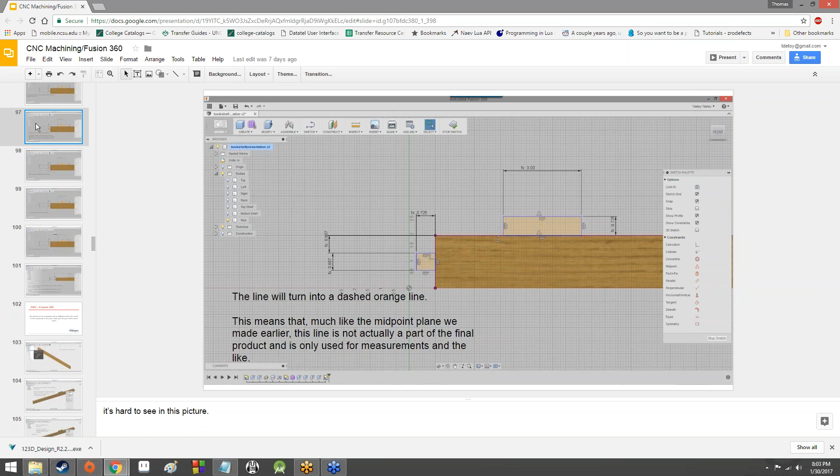All right, well, hopefully. Anyway, I hope you're ready to continue with Fusion 360 as well, because that's what we're going to be using today, to nobody's surprise. We've probably got about 2 or 3 more sessions left with Fusion 360. And then we will be moving on to perhaps VCarve. We shall see. So let's go ahead and get Fusion 360 open.

And that'll just take a minute. So we'll just hang out for a minute while it does its thing. Or two, minute or two. All right, off to a good start.

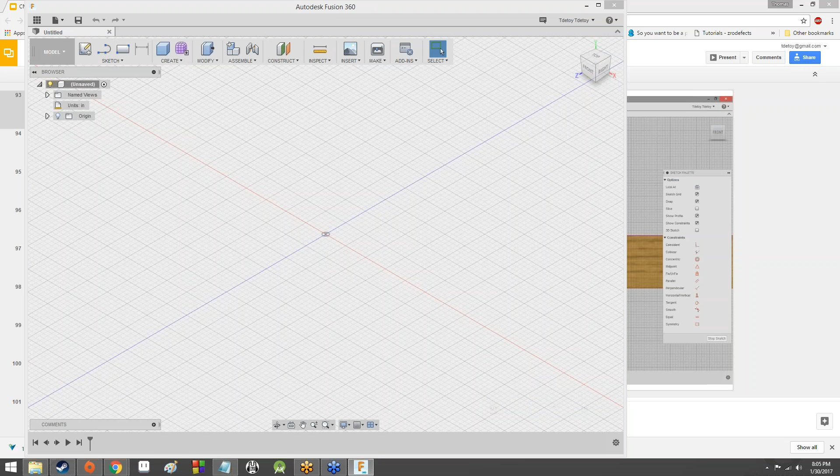This thing apparently has some pretty steep memory requirements, and a lot of stuff to pull from the hard drive. Okay. Oh, it looks like there's an update. Well, I'll see how far I can get before that update is applied and I have to restart. So I'll go ahead and open up the project we've been working on.

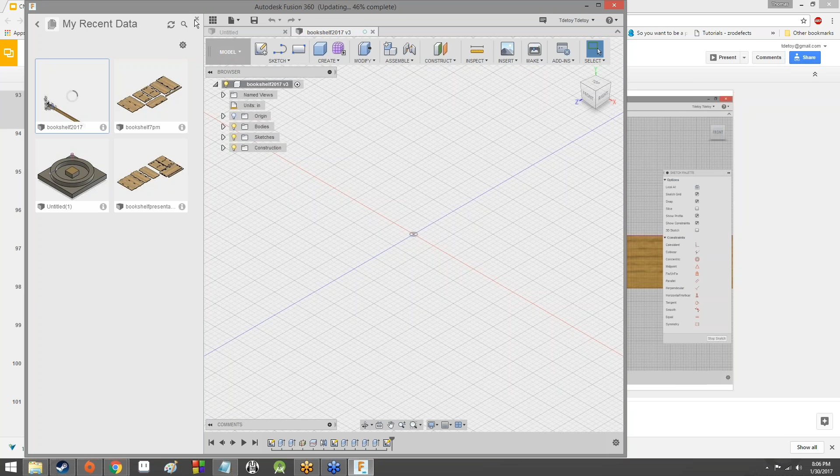It looks like it's updating. That's part of the reason why I've got just an absolutely abysmal frame rate. Let's see what happens once it reaches 100%.

I can't talk right now. Blep, blep, blep, blep, blep.

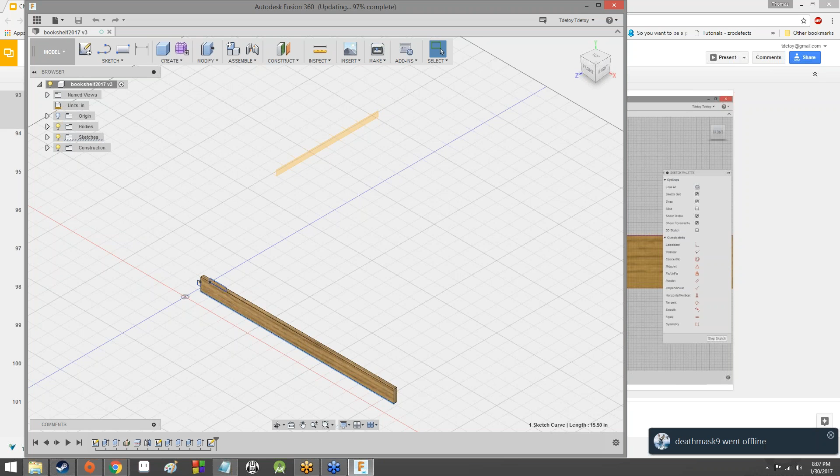Raise your hand if you're going through an update as well. Okay. One hand. All right, so you might run into the same thing as well.

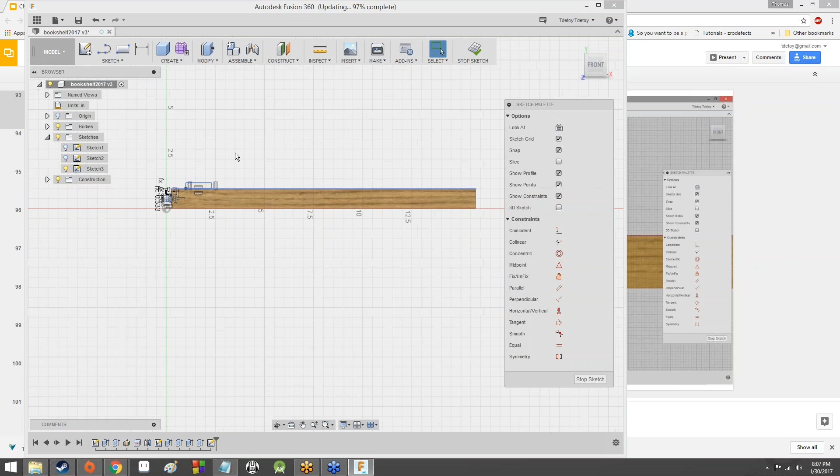Well, in the meantime, let's go ahead and continue with the sketch that we've got going on here. So last time we created a couple of tabs on the kick plate, right? So I went ahead and hid all of the bodies except for the kick plate, and then drew a couple of rectangles on it, one on the side and one on the top. The side rectangle we dimensioned out, the top rectangle we have not yet. However, that is the plan for both of them.

The side rectangle we dimensioned out so that it had a length of 1/4 inch, which was basically just the distance from the side of the kick plate to, it's just ply. It's actually ply. And can anyone sort of visualize why it might be ply? Take a guess as to why it might be ply.

Okay, well, the reason why it's ply is because it's going to be a tab that sticks into the side wall of the bookcase to help keep this kick plate anchored in place. That's the same deal with this tab on the top here. That's going to be anchored into the bottom shelf. So when all is said and done, this kick plate will be locked in place by these tabs. Now we've only got 2 tabs so far. We're actually going to eventually have 4, but we're going to spend some time getting these 2 tabs set up first, and then we'll worry about the other 2.

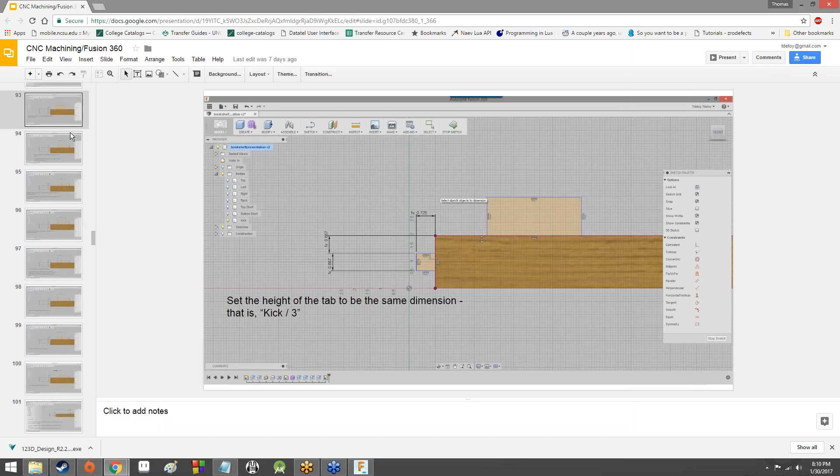So let's go ahead and sketch dimension. I'm going to go ahead and dimension out the height of the tab, and this is really running so much slower because it's trying to update at the same time. I'm going to set it to be ply. Hit enter twice, and make Fusion 360 go away. Okay, there we go. So now the height of this tab is ply. Then we're going to sketch the width, and the width is going to be tab.

So now it's 1/4 inch tall and 1.5 inches wide. And this is the size of most of the tabs that we're going to be working with in our bookcase design, at least for now. It's probably going to be modified a little bit in the future, but for now, that is the design we're going to be working with, the sizing and everything.

And then we're actually going to sketch a line on this tab right here, and there's a reason for doing that, which you'll see in a minute. So if I mouse over various spots on the line that defines this rectangle, sometimes symbols pop up. I know I'm on the line because I get a blue X on my cursor.

The top dimension, that's just tab. It's one of our user presets, which turns out to be, I believe, 1.5 inches. And then the height of it is ply. Okay. All right. Excellent.

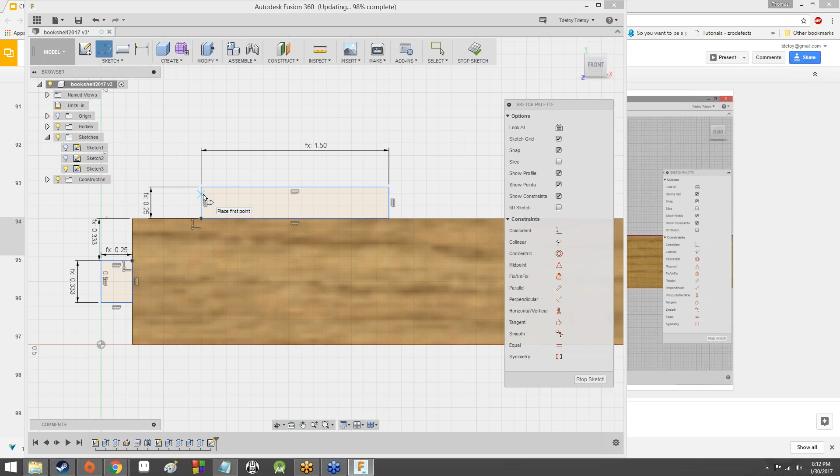So yeah, I know I'm on the actual line defining the rectangle if it turns into an X. I know I'm on a corner of that rectangle if it turns into a square. And then there's one where I get an X and a triangle. That lets me know that I'm at the midpoint on that line. So as you can see up here along the top, I've got my cursor there, I've got a blue X, and I've got a blue triangle just sort of hovering up and to the left of that blue X,

which is great. That means that I am at the midpoint of that top line, and that's exactly what I want. So I'm going to go ahead and click there, and I'm going to draw a line straight down. I'm going to confirm that it's straight down because I get the little 90-degree indicator above and to the right of my cursor.

And where my cursor is, again, I have a blue X and a blue triangle, and I have another little blue symbol. It's a little blue square on that line, which is just letting me know that it's a 90-degree angle. So I'm going to go ahead and click there, too. And I'm going to create this nice blue line.

What are you trying to dimension, Mateo? What are you trying to dimension that gives you that? Which part of it? Were you able to get one of the dimensions done, or has neither of them worked? Okay. Tab's supposed to be 1.5 inches. I may have accidentally put 3 when I was putting them down. Okay.

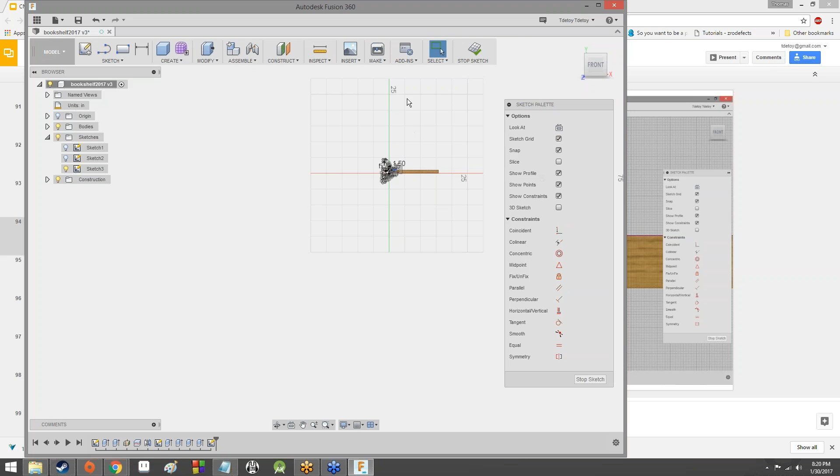So we've just turned that line into a construction line, just like that midpoint plane that we have somewhere up here. Or I guess somewhere up here. Whatever. Anyway, so if you click on the line, you'll get the sketch palette on the right-hand side, right?

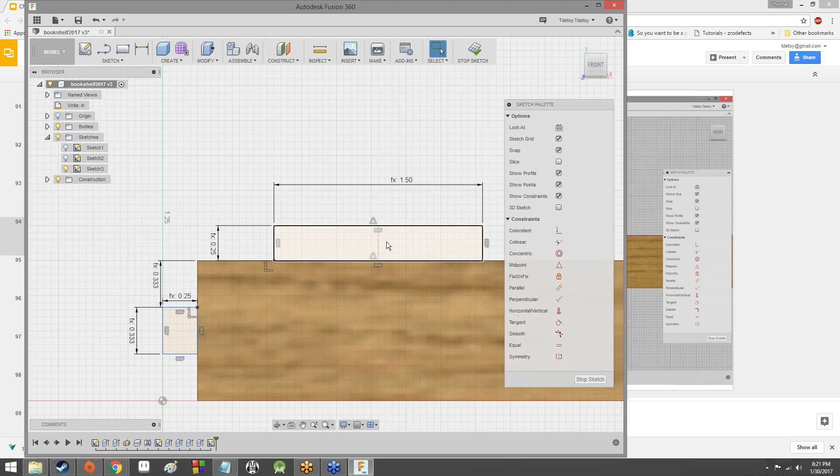Do you see the sketch palette? Okay, yeah. It's going to be normal/construction at the top there, and then that's going to turn it into an orange dotted line. For sure. So now we've got that. We're actually going to use this to determine the distance between the origin and the midpoint of this rectangle.

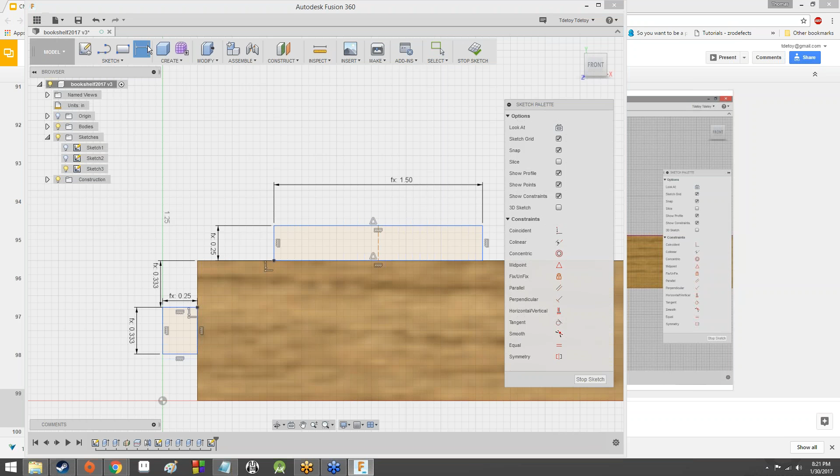So remember that a construction line isn't actually part of the final product, right? So I'm going to click here on the origin, I'm going to click here on this construction line, and I'm going to bring out a dimension here, and I'm going to make that width divided by 3.

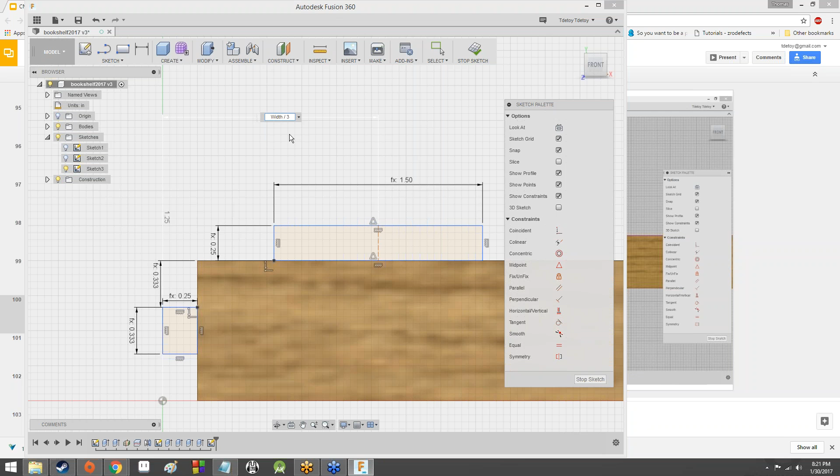Bam, and it's going to stick that tab way further in towards the center of the kick plate. So now we've got one on the side and we've got one in sort of the middle top. Now why do you think I used the origin? Any guesses?

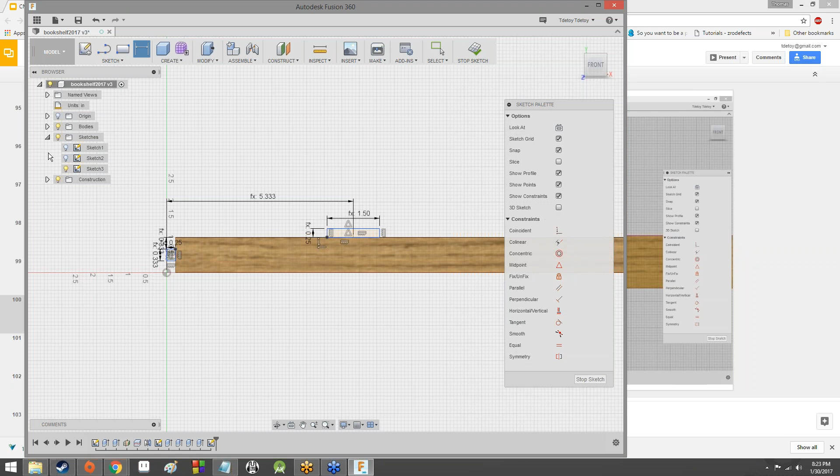How so? Which part is not working for you? Oh, you can't even draw the initial line before making it a construction line? Is that what you're asking? Because you say it won't let me draw the line. Are you saying that you can't draw this line that we drew right here?

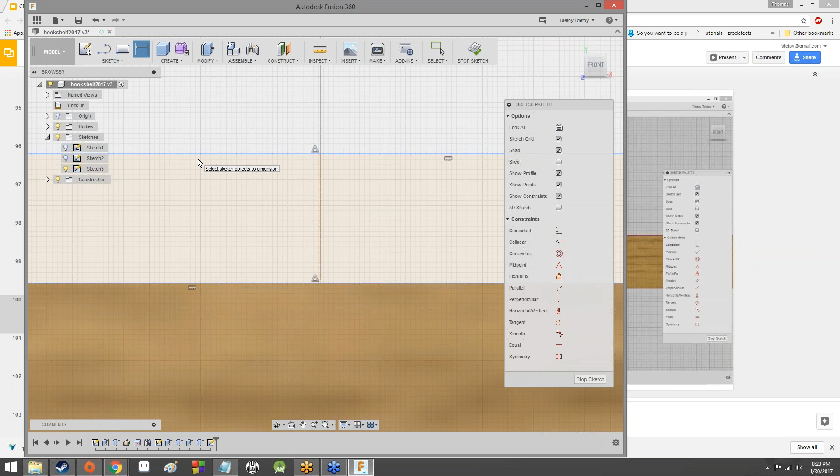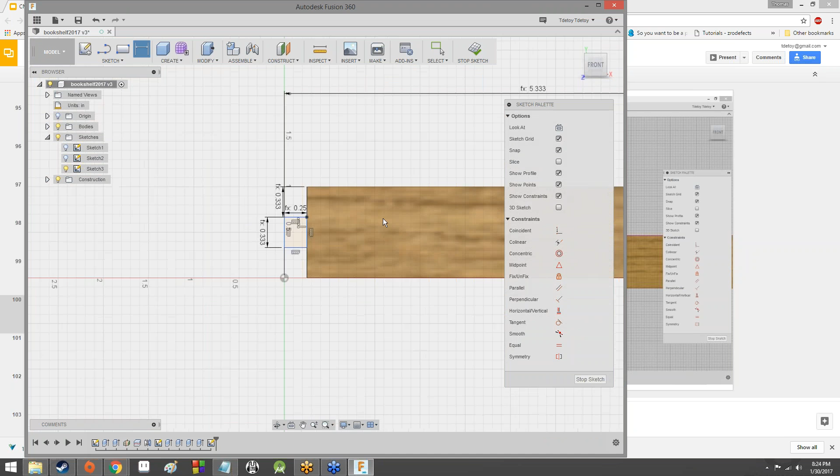Okay. So you can't sketch the dimension then? Okay. So you clicked on the origin, right? Like you got the little dot that pops up when you mouse over the origin and you clicked on that? All right. And then you clicked on the construction line over here, right? Like it highlighted and became like a little bit blue when you clicked on it?

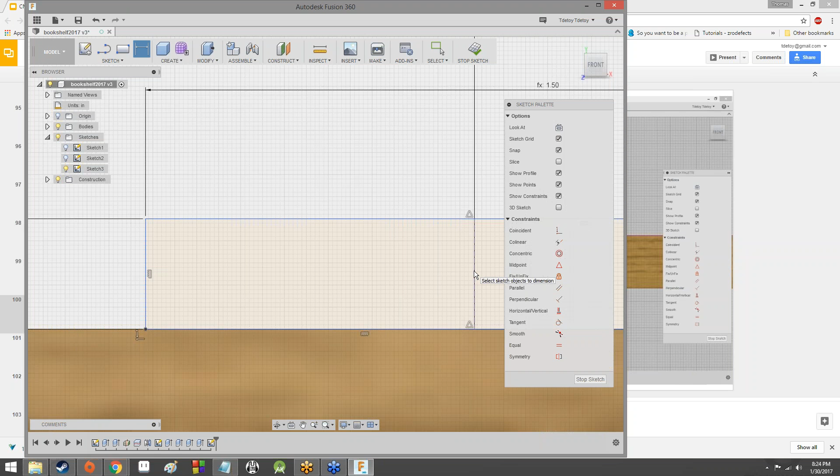That's odd. That shouldn't be the case because, hmm. So what? It's trying to dimension out from the origin when you're sketching dimension? Is anything happening when you move your cursor away from the origin? Like, are you getting any sort of measurement coming out of it or anything like that?

Okay. All right. Well, as long as it's working now. Oh, gotcha. Yeah, that happens. This is surprisingly resource intensive. Okay, so yeah, make it width divided by 3. And so does anybody have any guesses as to why we used the origin?

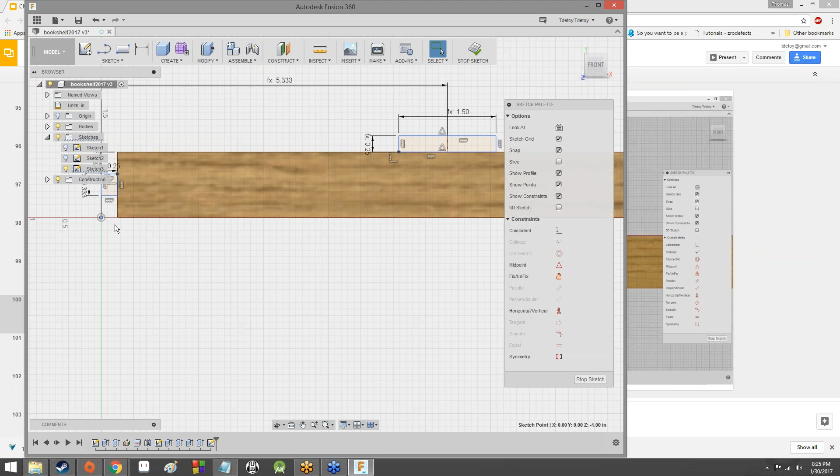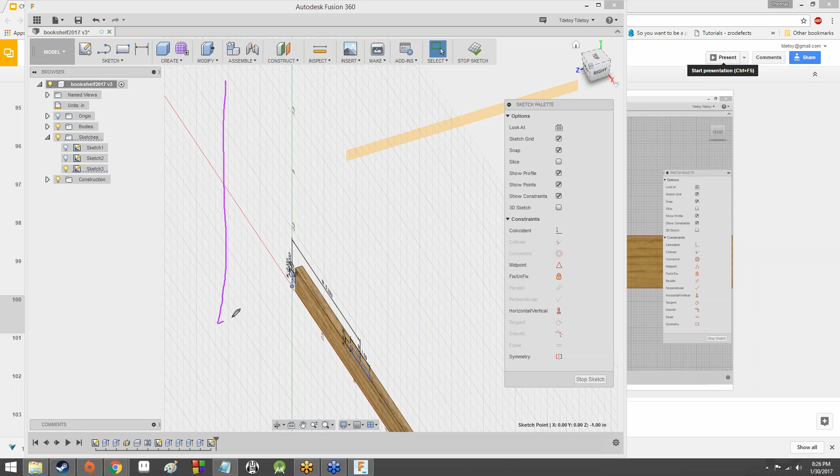Okay, so I'll tell you. Remember that initial sketch we drew that had all of the rectangles on it? We drew that on a plane that was perpendicular to this one. Essentially, if we were to look at our drawing like this, our initial rectangle drawing, let's not use gray. Let's use purple. Our initial rectangle drawing was oriented kind of like this, at a perpendicular orientation to our kick plate right now.

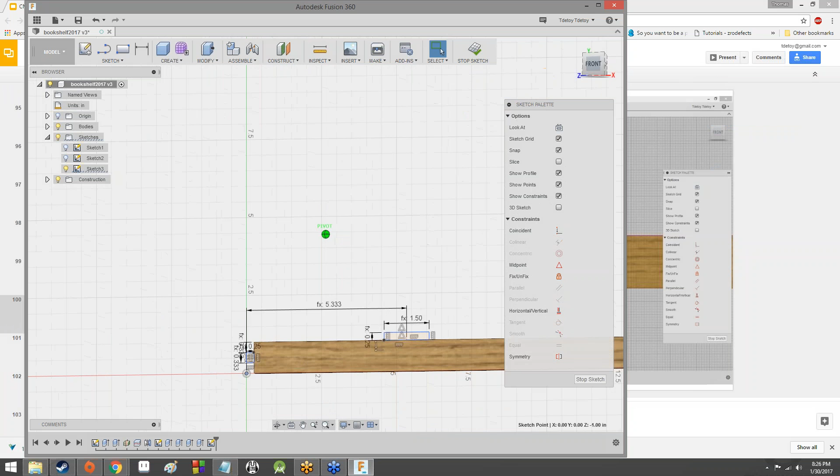We drew it on that plane and we started at the origin, the actual Fusion 360 origin, which means that if it's at the origin on a plane perpendicular to this one, looking at it from this angle, we're essentially looking at the drawing side on right there. And remember how we extruded the wall of the bookcase out from our drawing? So the wall of the bookcase is something like that, which means that our kick plate

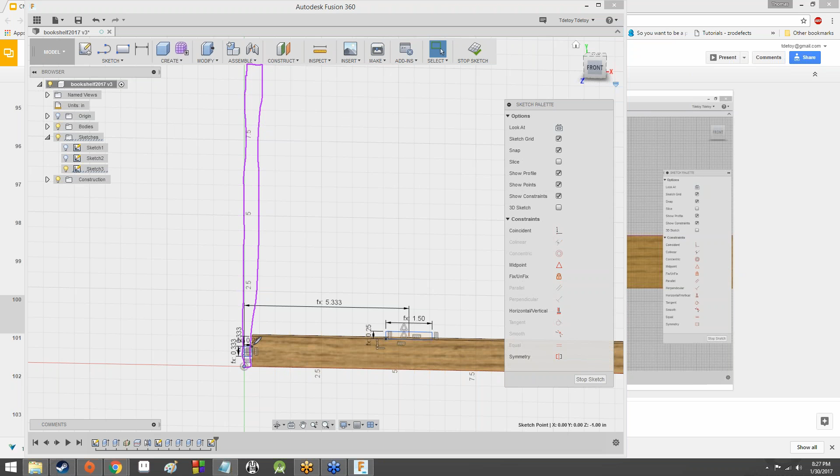this tab right here is basically flush with the outer surface of the side wall of the bookcase. So this origin right here represents the start of the outer surface of that side wall of the bookcase. So what we're doing is we're measuring a third of the entire width of the bookcase, from the outer surface on one wall. I'd like to do a smaller drawing here.

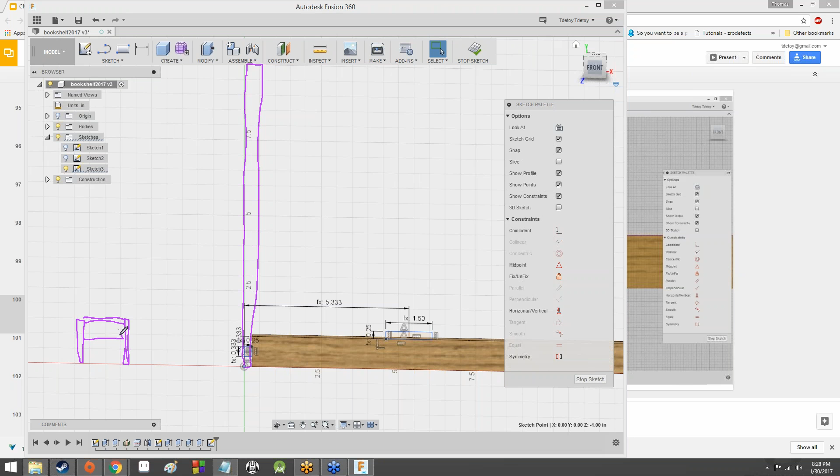What a charming little bookcase. Oops. So this is what we're looking at. We're actually measuring from here to here. That's the entire width of the bookcase. That's why we're using width divided by 3.

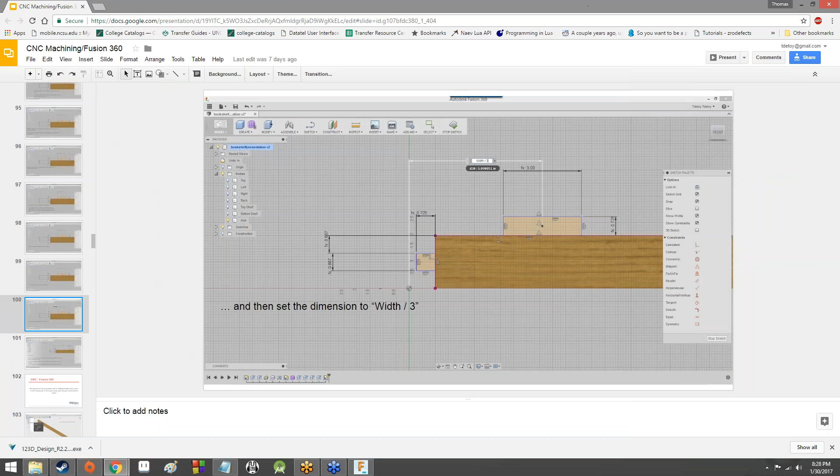So with that done, actually, why don't I just make this easier? Left wall. Boop. There it is. As you can see the origin right there. Bam. With that done, we've actually finished the sketch for that kick plate.

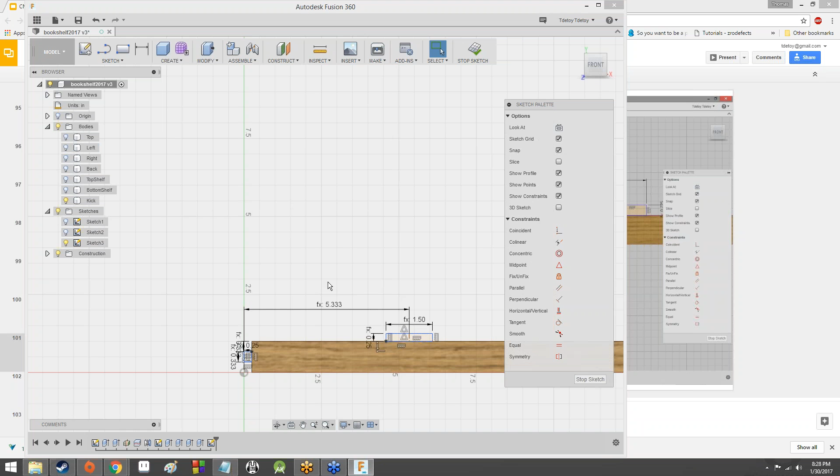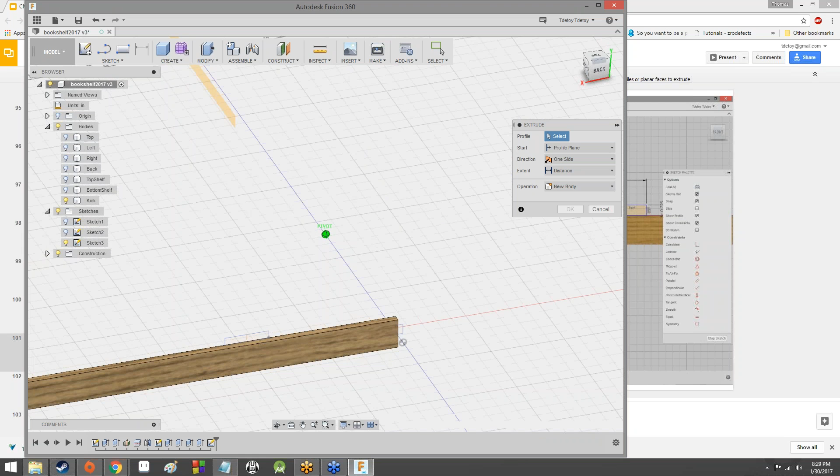Excellent. So now what we have to do is basically extrude those rectangles. So we're going to go to create and then extrude. And so now we've got our 2 rectangles sort of floating here in 3-dimensional space on the side of the kick plate. I'm going to click one, and I'm going to click the other one.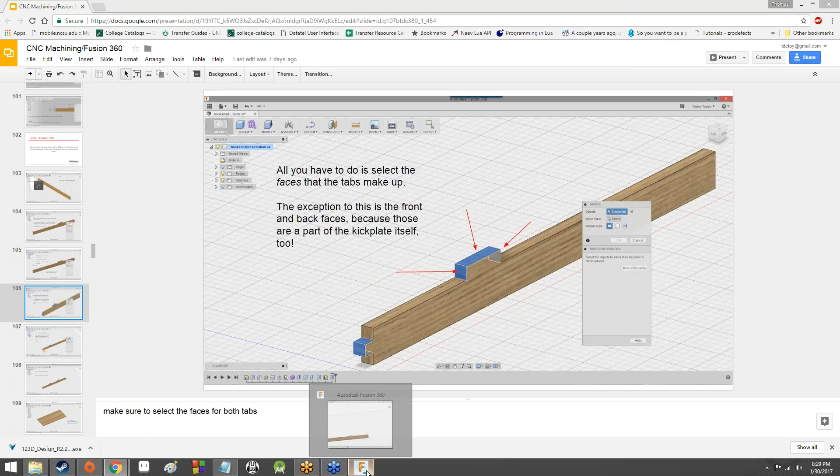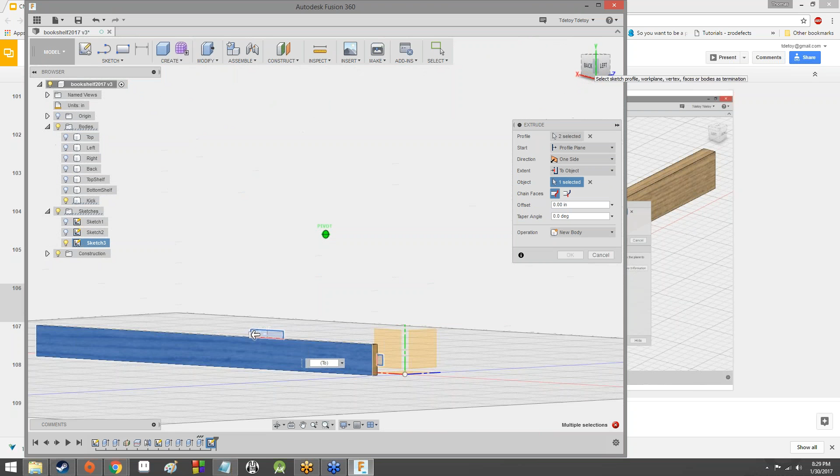So now we've got our 2 places to extrude, and we want to extend it to, so remember doing the To Object part of extension, or extruding, we want to extrude it to the back. Why? Okay, it doesn't want to cooperate for some reason. All right, let's try it again.

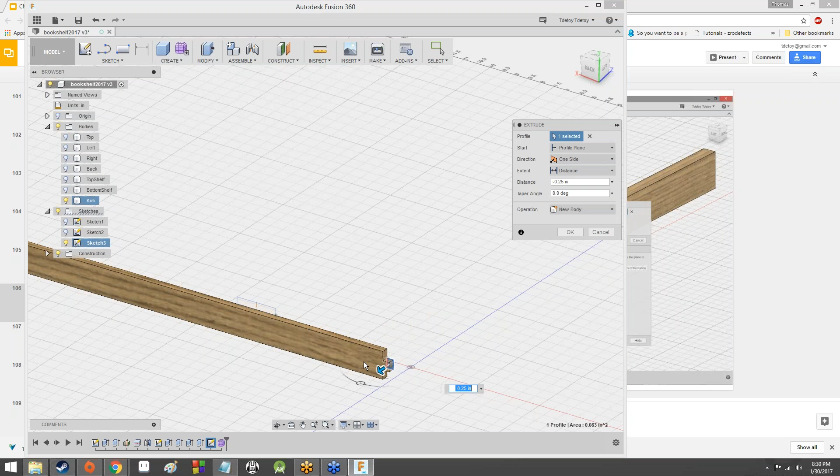So we click both of these things, select the extent To Object, and then we click on the back end here. It doesn't want to do that. What if we did this? If we do 1, it works. If we do the other, it also works. So we have to do them one at a time. So, whoops, I need to stop missing what I intend to click.

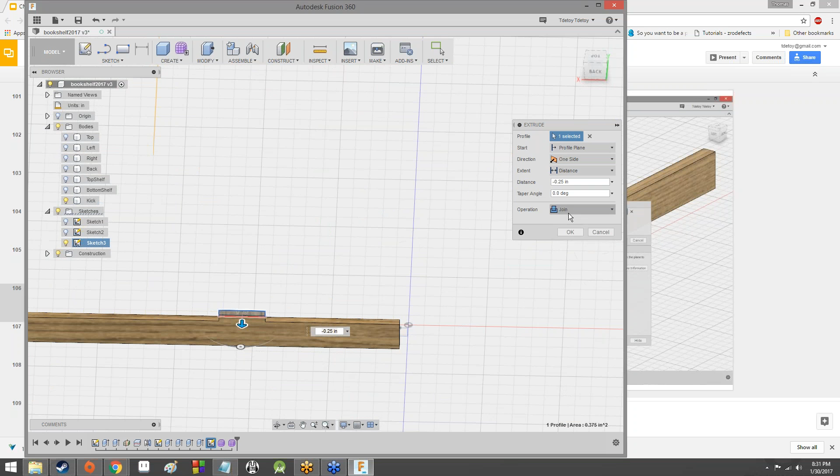So I'm going to click on extrude, and then I'm going to change the profile to just one of our rectangles. And then I'm going to click on the back end of this kick plate, and look at that. It went ahead and it extruded it across the top of the kick plate. And I'm going to go ahead and change the operation to new body. So now we should have something that is completely separated from the rest of the kick plate.

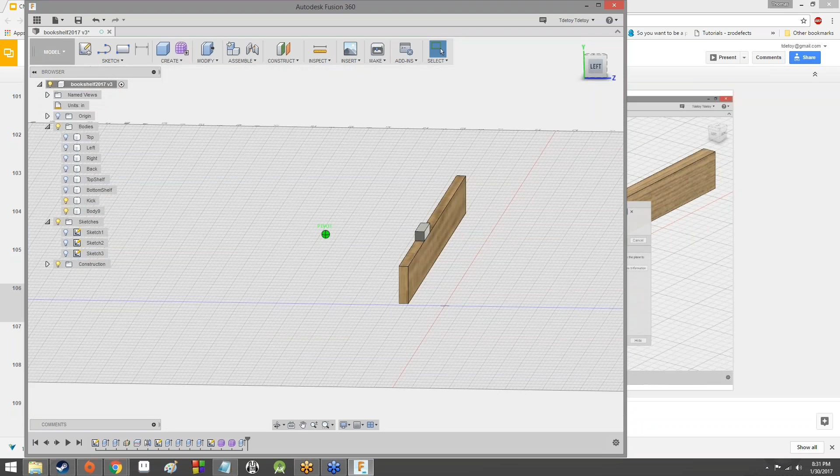So as you can see here, if I zoom in, there's this little rectangular prism that's floating on top of the kick plate now. And I'm going to hit OK. Scroll around it. Now I got this little gray rectangular prism, this little gray box floating on the top of the kick plate.

I'm going to go ahead and select sketch again so that I can see this side rectangle. And I'm going to extrude this one out. And again, make sure it's new body. Hit OK. And bam. Now we got 2 little boxes here sitting on our kick plate. Go ahead and raise your hand once you've done that.

Oh, okay. All right. Well, as long as you got the dimensions right now, you can extrude them as well. Go ahead and extrude them, and then make sure it looks like what I got here, and then you'll be caught up. But in the wrong place. So the dimensions wouldn't be right if that's the case. What exactly do you mean by that? Uh-huh. My supports. What supports? You mean the tabs?

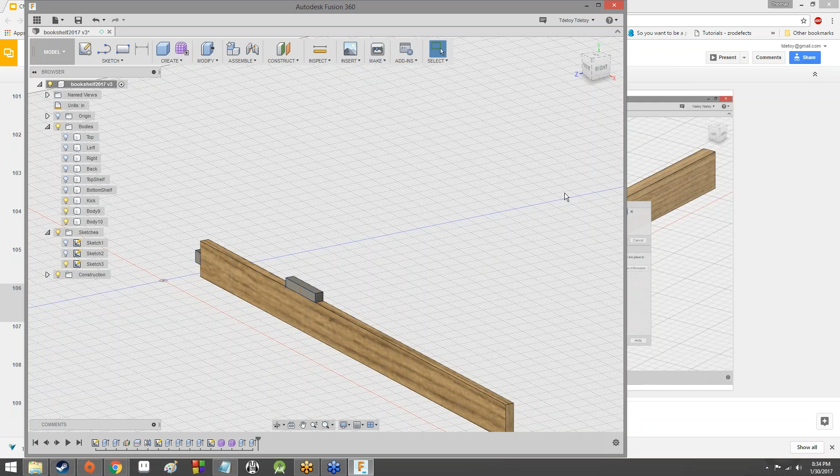This kick plate is one big board. It runs almost the length of the entire bookcase. It runs from one wall to the other. Okay. Yeah, yeah. There you go.

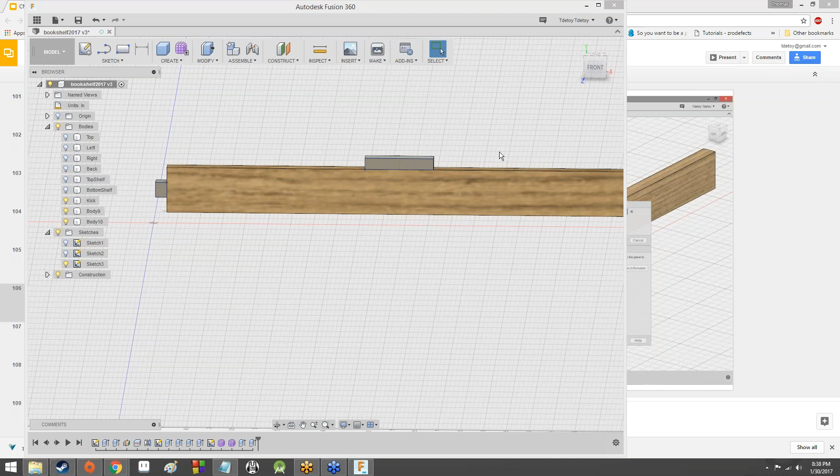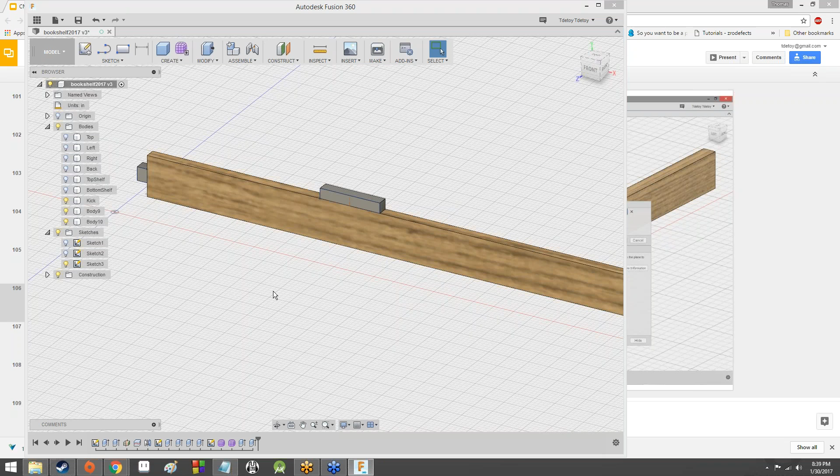All right, and we still don't quite have every hand up anyway, so we'll give it a few more minutes and then we can mirror this across. Once you guys get this down though, the rest of the tabs will go much more quickly because it's essentially the same process, just done to different parts of the bookcase. Spinning around like crazy.

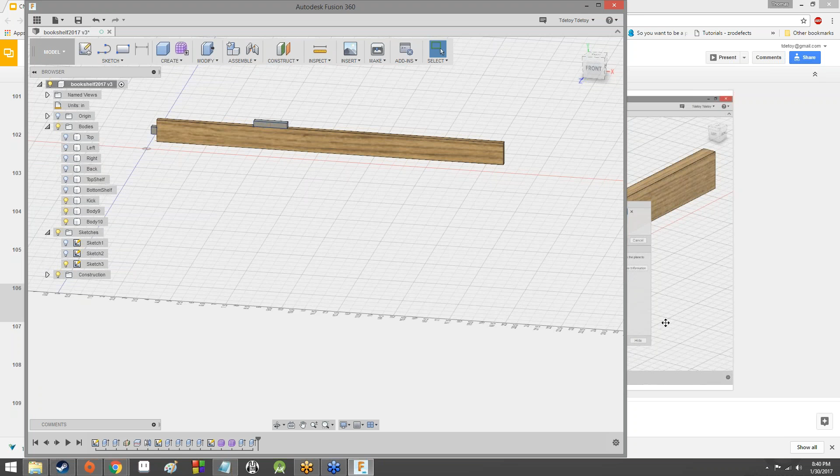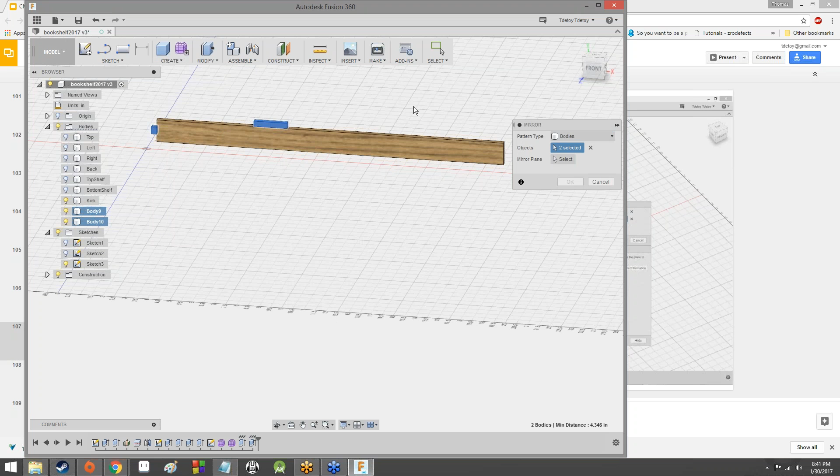So now what we're going to do is we're going to mirror these two tabs. So under pattern type, we can select bodies. So we're going to click these two bodies here, these two separate tabs that we created. And then for mirror plane, we're going to select that midpoint plane that we created earlier on. It should hopefully still be floating up there. If not, just make sure that it's visible under construction.

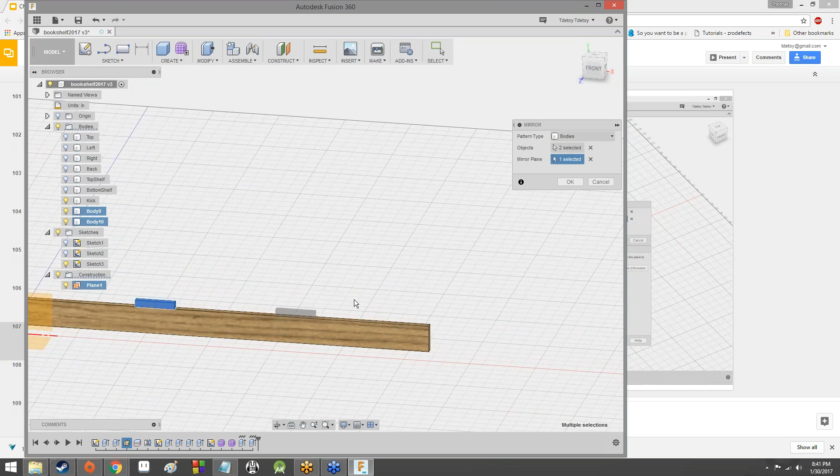When that's done, you should see two little gray bits kind of floating here. For some reason, this one on the right disappears when I zoom in too much. Yeah, the one on the left does as well. So if you can't see them, maybe zoom out and they might appear. And then I'll hit OK, and boom, there they are. Now we've got four tabs sitting on the kick plate.

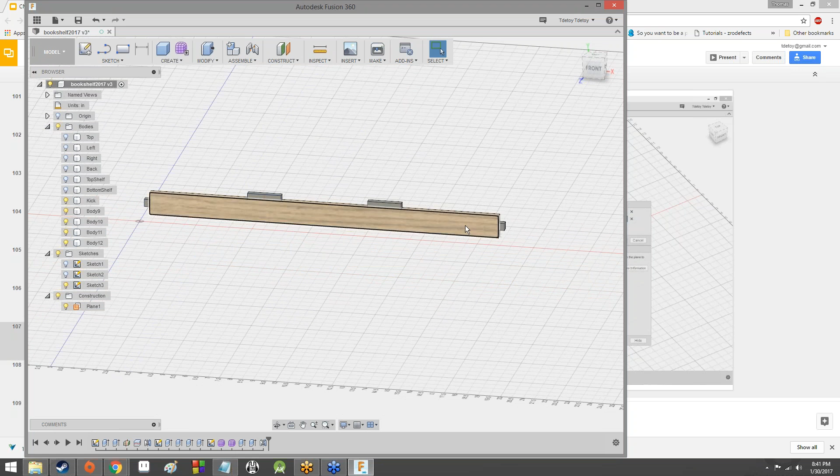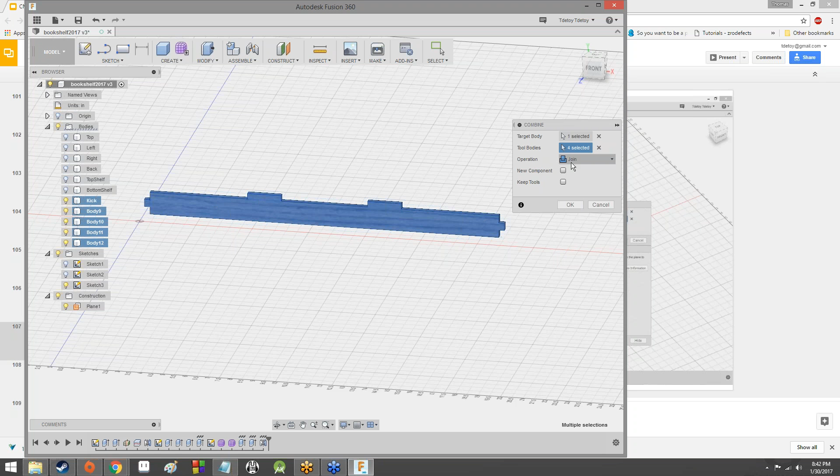Two of them are going to slot into the bottom shelf, and then two of them are going to slot into the side walls. Then I'm going to go to modify and then combine. And I'm going to click on all of these different bodies and make sure the operation is join, and I'm going to hit OK. And so now they should all become one happy family. Raise your hand once you've done that.

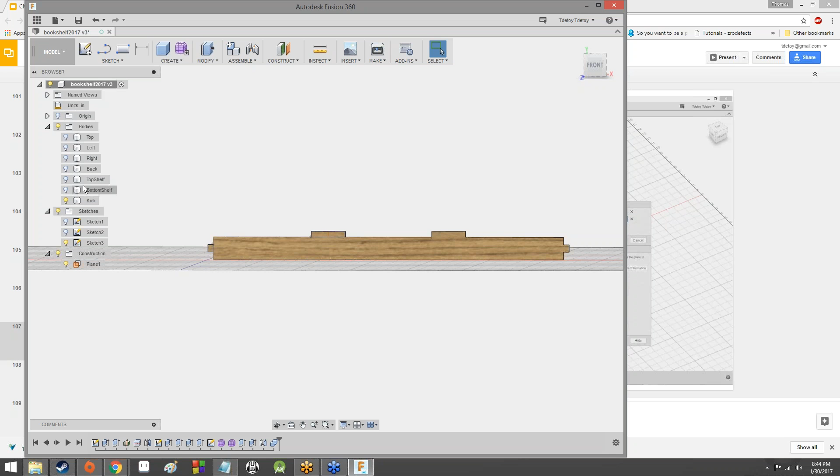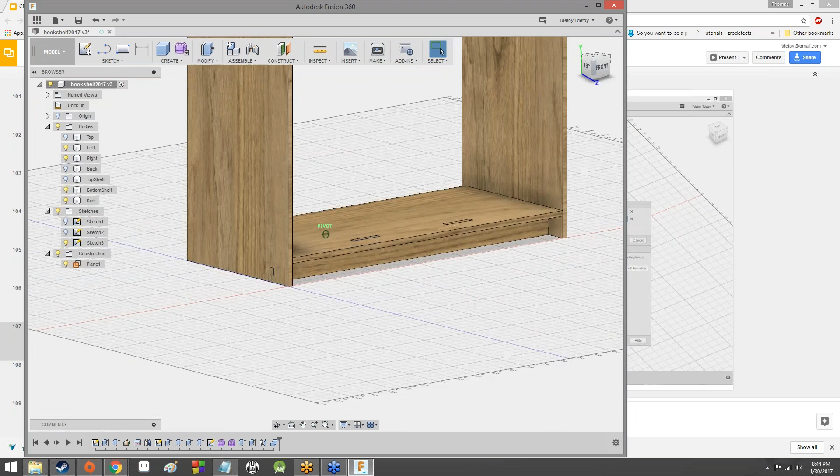So now if we look at the left and right walls and the bottom shelf when we do this, you can see that the kick plate, those tabs kind of clip through, they're visible. This should give you an idea of how everything is going to kind of fit together. So now we just need to do that with the other bits on the bookcase.

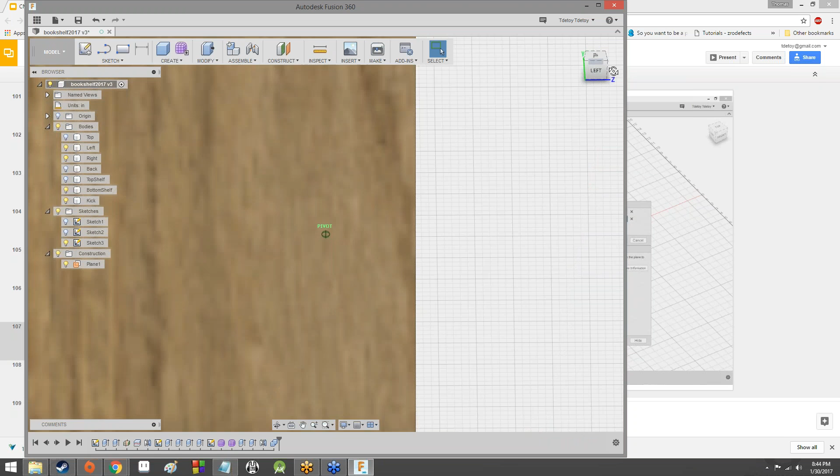Also, you might notice if you zoom in and you kind of move the camera around a little bit, like pan or rotate, you might notice that the texture on the part where the tabs are just kind of freaks out, like it flips out, and it almost looks like static. What's basically happening there is the texture for the bottom shelf and the texture for this top surface on the tab for the kick plate.

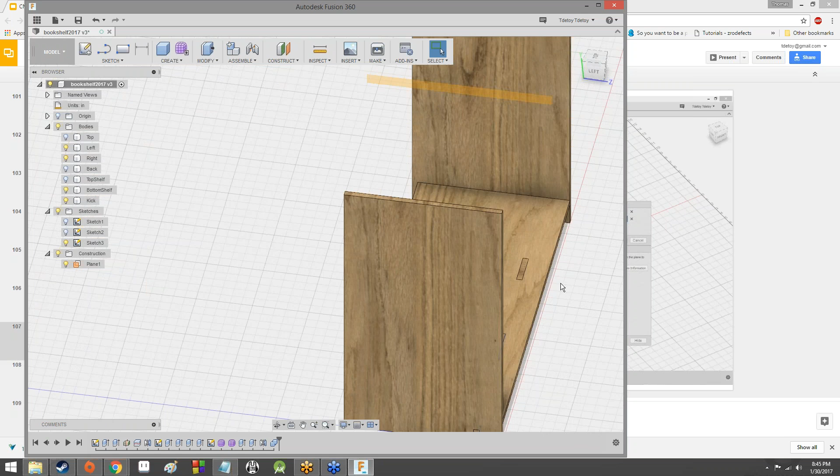What are you trying to delete? No, don't delete the whole board. You shouldn't have to. You should just be able to redimension that part of the sketch, not the body, but the sketch, the two-dimensional drawing that we made. And that should resize that board for you because its dimensions are based on that initial sketch.

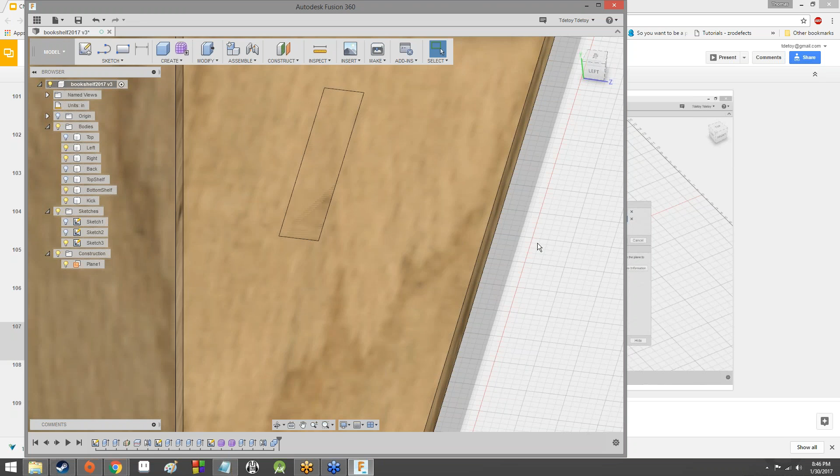It looks like it should be that size. Well, so it looks like it should what? Okay, so you've got two vertical rectangles then? Okay. You should only have one that represents the kick plate. There should be two vertical rectangles, and one of them is the back of the bookcase.

You might also want to double check and make sure you didn't accidentally click a couple. They shouldn't be fused together. They're too far apart to be fused together. One should be near the front of the bookcase, the kick plate, and one should be at the exact back of the bookcase, which is the back wall. If they look like they're fused together, they're either in the wrong spot or one of them is too large. I'm assuming that the kick plate rectangle is too large. And that's what I've been saying.

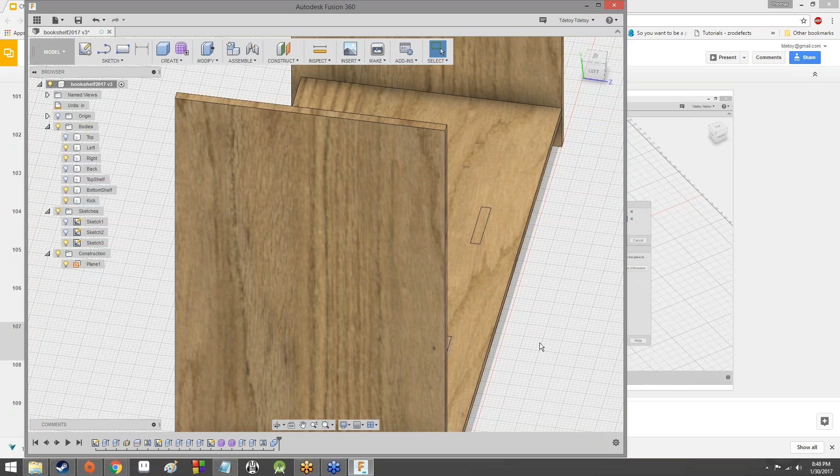Let me go ahead and pull up sketch one again and hide the bodies. So the kick plate rectangle should look like this, right? It should just be this little rectangle right here. If it's gigantic and it's going back here, you need to redimension this bottom line right here that represents the bottom of that kick plate rectangle. You need to redimension that to be, I believe it's ply, so it should only be 1/4 of an inch. See what I'm saying?

Okay, let's see here. There doesn't seem to be anything wrong with this. This looks fine. You might want to double check and make sure you didn't accidentally select the rectangle for the kick plate and then the rectangle that lies between the kick plate and the back wall of the bookcase. Also, on the back wall, the two vertical lines should be selected as well.

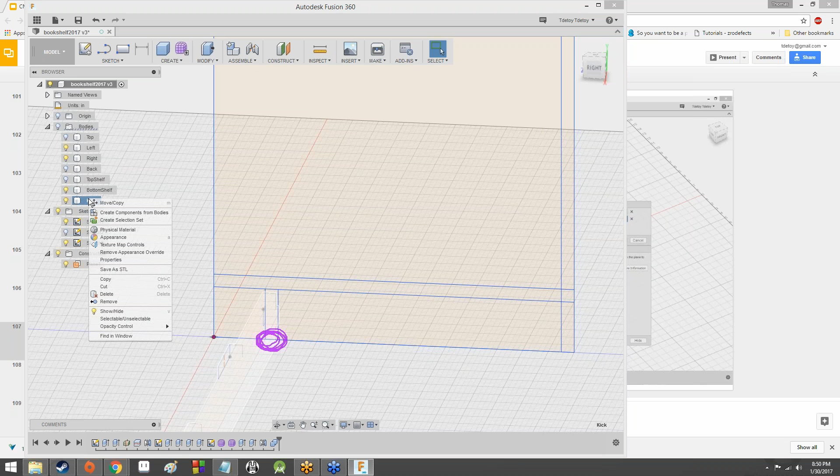Okay, tell you what. In case you run into a situation like that, and this goes for anybody who runs into the situation, you should be able to right-click on a body in the browser, in this case the kick plate, and then just select delete, and that will get rid of it.

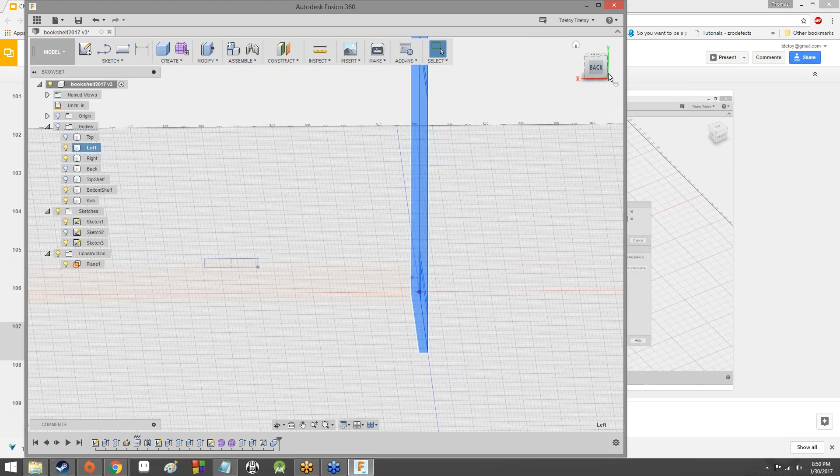Is it giving you an error message? I mean, you got to give me more information than that, then it just won't let me delete. Tell me if it's not doing anything or if it's throwing an error message back at you.

If the option is grayed out, so you click on it and nothing happens, like it just doesn't go away. Okay.

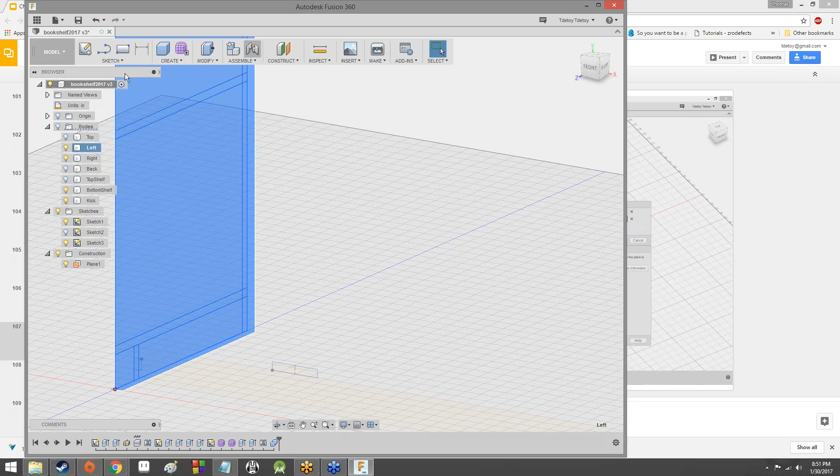You don't even get like a deletion warning or anything like that? It says this feature is referenced by other features in the timeline. Do you get that? No. Huh.

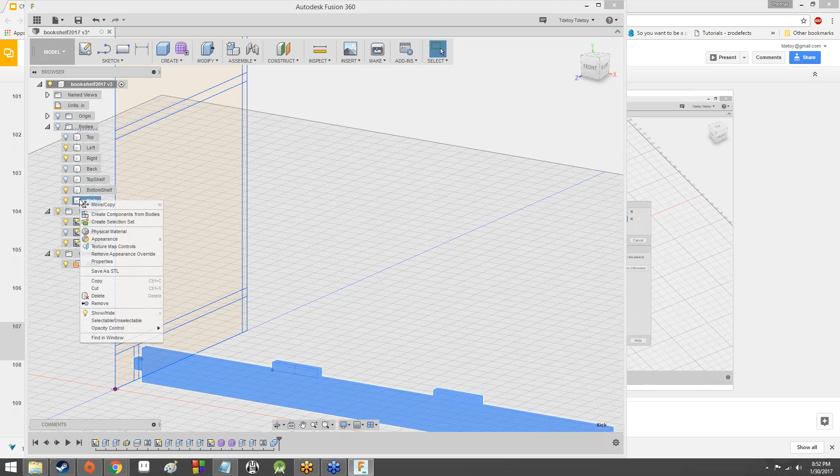I'm inclined to think that there's something that happened at the very beginning of this project that's messing everything up, and you might just want to start over new. I don't have many other answers other than that, unfortunately.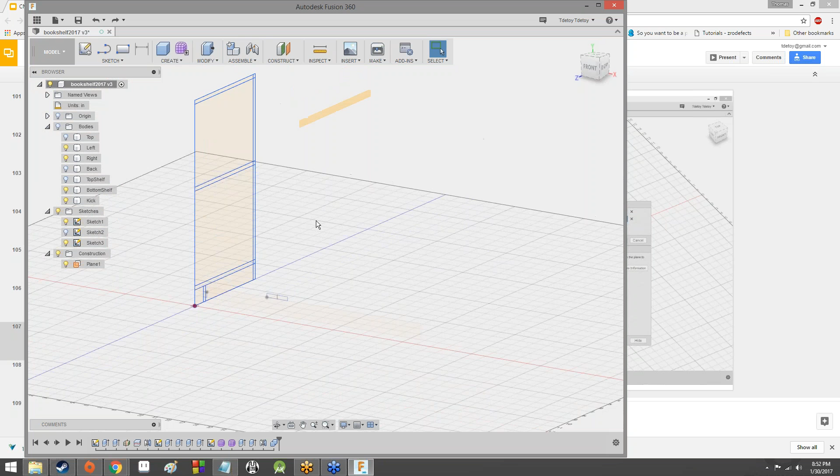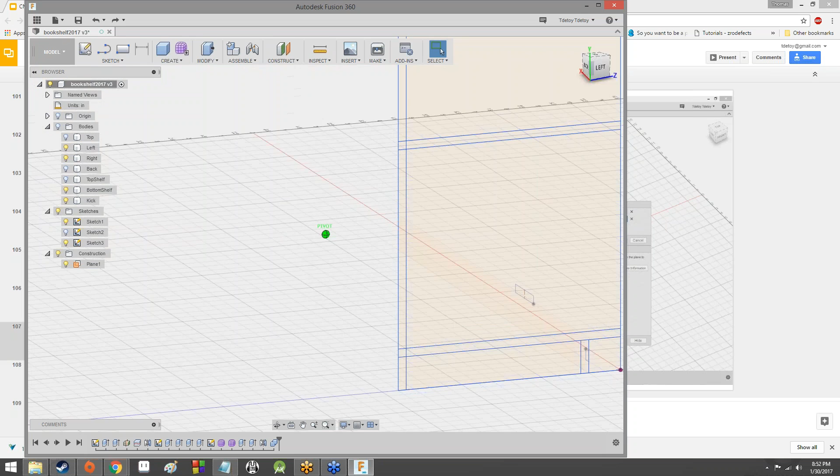Because I feel like we've been handling some of the symptoms of what's been going on, but there's something there that I'm missing, that everything else is built off of at this point. And that can be the frustrating thing with a lot of these engineering style CAD programs, because everything needs to be based off of something else. And if it runs into a situation where there's one thing that everything's built off of, it can kind of just bork everything trying to fix that sometimes. And it's just absolutely infuriating.

So yeah, okay. That sounds good. Let me know how that goes. Hopefully there will be a little bit more luck this time around.

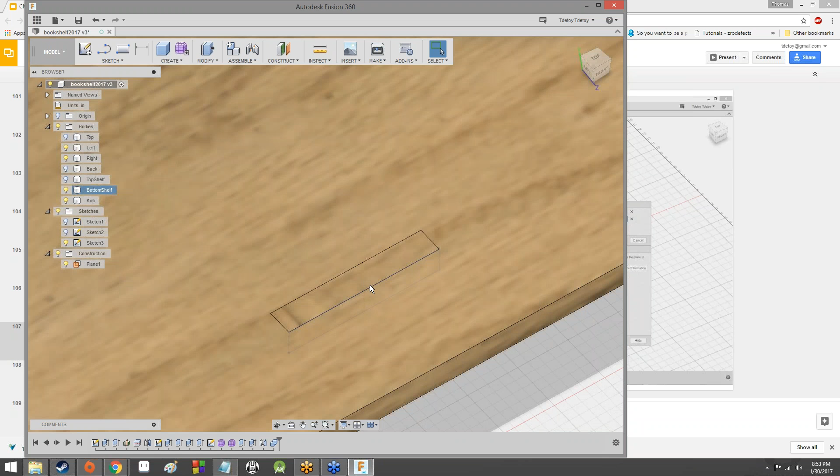So yes, back to the thing we were saying. The reason why this is happening is something called Z-fighting. The surface that's the top of the tab for the kick plate and the surface that's the top of the bottom shelf are in literally the exact same position. So the computer doesn't know which to draw. You kind of move it a little bit and it flips constantly between drawing both of them.

That's why if you've ever played Minecraft and written something on a sign, sometimes the words disappear on the sign. That has to do with how the computer renders what order everything's in. And if everything's on the same plane, then the graphics protocols get confused. And the way that they compromise is to try and draw both at the same time, but not update them unless that surface is called to be updated.

A lot of times, in order to save computations, those surfaces won't be redrawn until they absolutely have to be - that is, your perspective changes or something happens to that object.

So that's going to look a little weird until we get that fixed, because essentially, if I hide the kick plate again, those areas on the bottom shelf and the sidewalls are still solid. We actually need to cut out holes that are the size of these tabs so that we have holes for them when it's cut out.

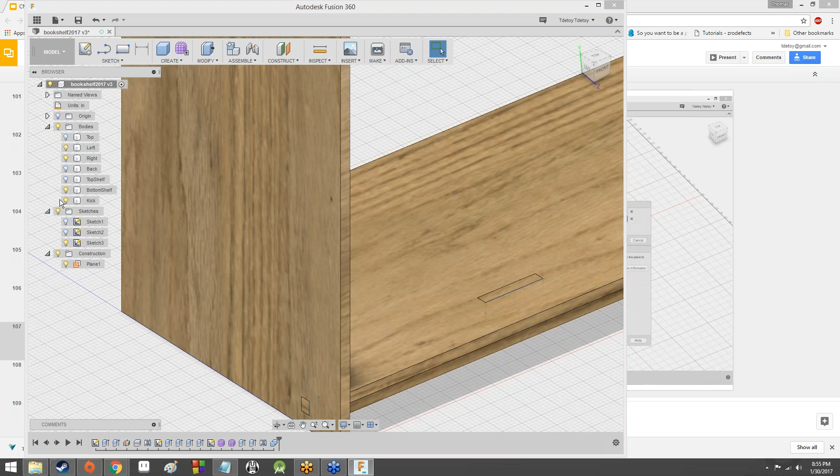So that's something we'll address once we've created the tabs for everything. We'll make it so that we can very easily cut out some slots for those tabs, and that will probably be close to our last thing we'll do to get this bookcase up and running. So we'll get the tabs in, the holes for the tabs, the slots for the tabs, and then this thing will be ready for the cam step, whatever that means.

Either we continue using Fusion 360 for the cam step, or we give VCarve a try. But that's actually going to do it for today.